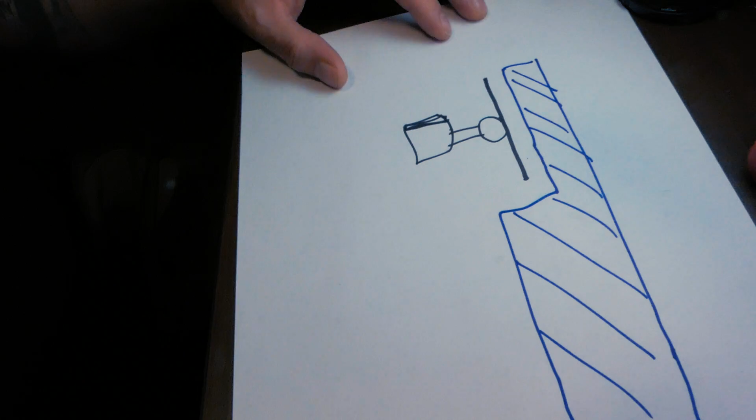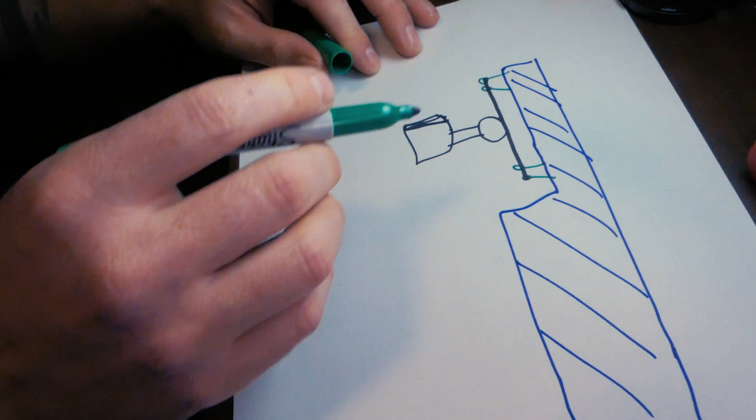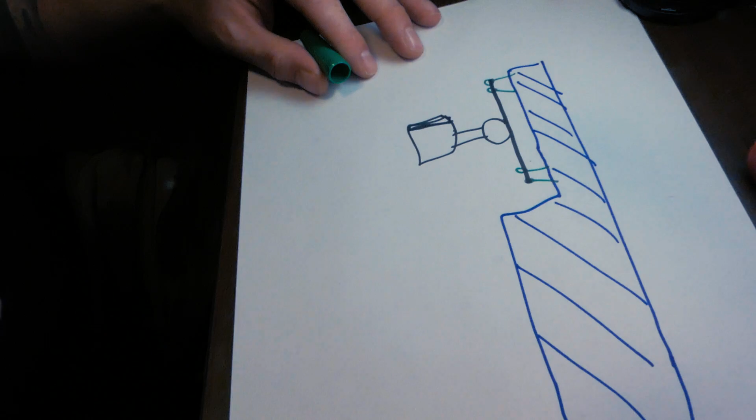This little plate is connected to the top of the body by 4 rubber bands. So at each corner of that plate, there's a rubber band that connects to the body of the Mavic, and that acts as a damper for the vibrations. So as the Mavic is flying around, those rubber bands act as a shock absorber, and that helps the gimbal stay steady, or at least adjust towards what's happening.

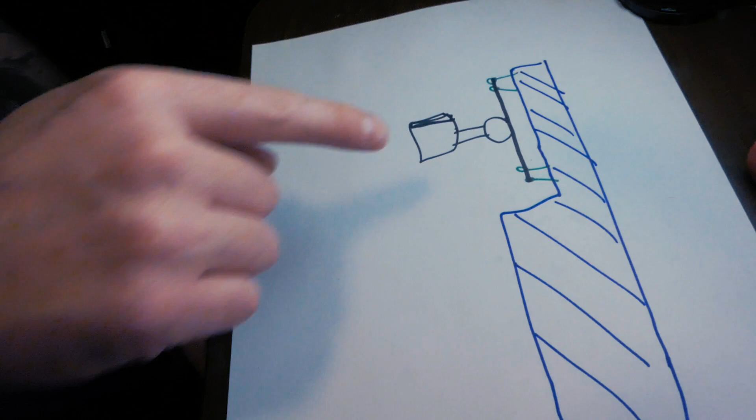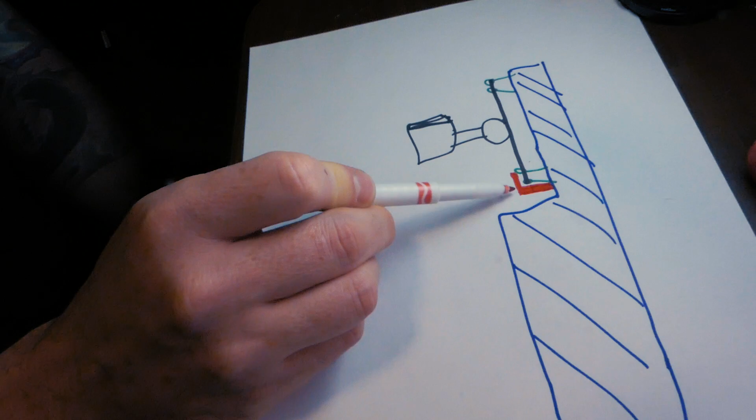Now, when the drone fell down, hit the tree, and fell to the ground, that plate obviously got hit. Inside the gimbal cavity is a little black hook - I'm using red here so it's easy to stand out. That red L-shaped bracket right there, this plate actually rests on, or is supposed to rest on, that hook. It's a little black hook inside this cavity that the plate sort of sits on.

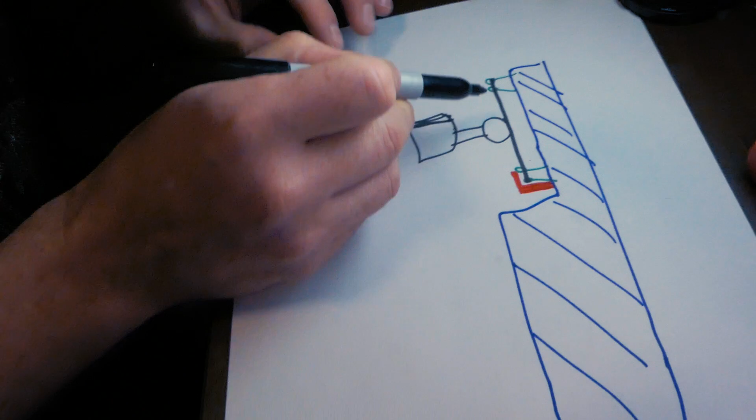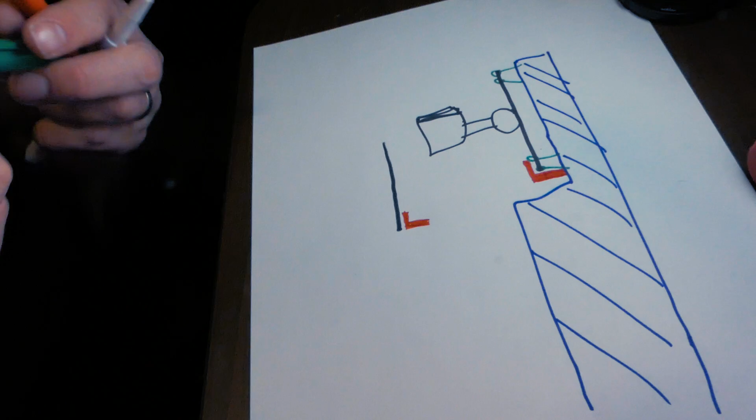Well, in the crash, the plate had actually bumped it out, so the plate was sitting below that. What ended up happening was there was way too much play for these rubber bands, and it allowed them to just jiggle around - way too much play. So what happened was the gimbal wasn't able to keep up because there was just way too much vibration on that plate.

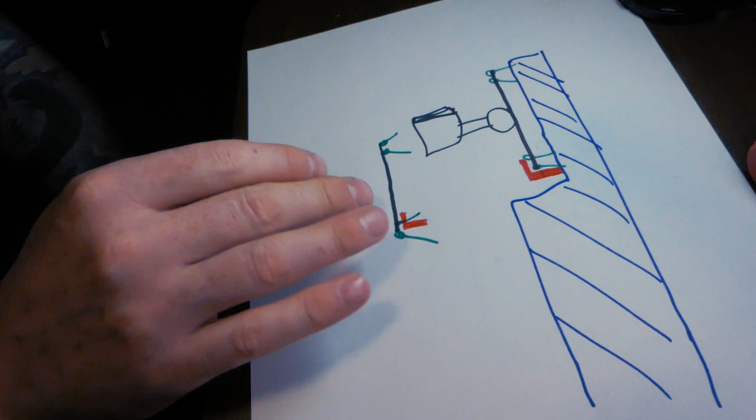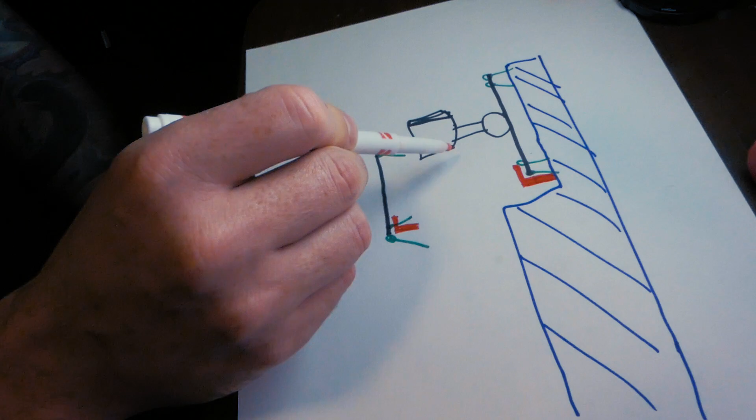So I was able to gently ease that plate back out, pop it back below this little bracket inside there, and boom, voila - back to normal. So as long as these 4 rubber bands are intact, none of them snapped, and as long as the little cables that feed information to and from the gimbal arm are intact and not kinked, broken or ripped, you should be good to go, as long as the camera itself wasn't damaged.

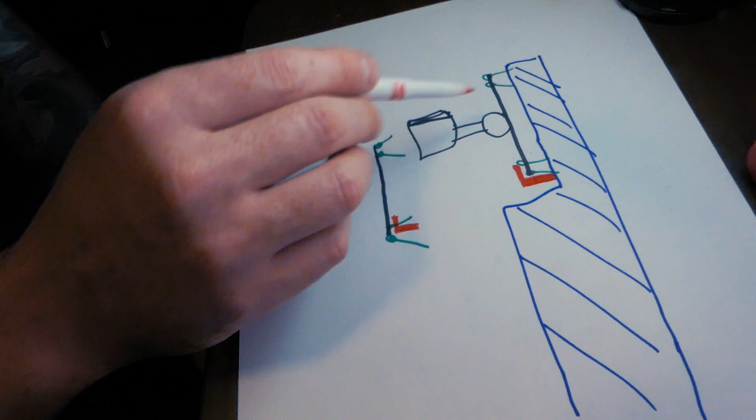I mean, anything that gets cracked, broken, ripped or torn, you're not going to be able to recover. But if it gets bounced around in there and this little plate gets knocked out of whack underneath that little L bracket, you can gently pop it back in place and boom, it's back to normal.

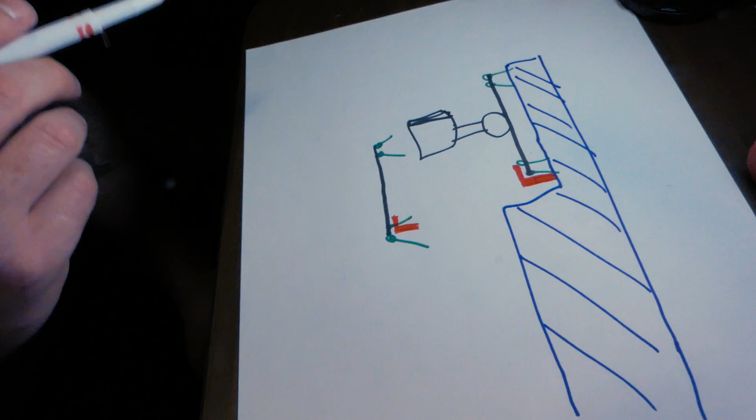I did a little gimbal calibration, and then you saw the footage of the camera after we finished buttoning it up, and the gimbal is back to steady and good. Hope that helps - I'm not sure how well that translates or makes sense, but that's what happened. The good news is the drone is fine, and I can once again tell you, holy crap, this little drone is a tank.